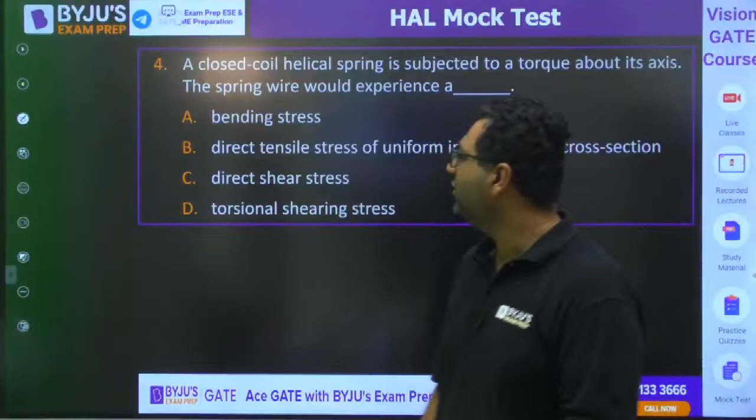Moving further, guys, this is the very first question. So why the number is 4? Because out of 100, my question numbers I am taking into consideration. So my first question is starting from question number 4. Yes, Ashish, good morning. This is the first question, guys. A closed coil helical spring is subjected to a torque about its axis. The spring wire would experience?

So I feel you are aware that whenever we are having this spring, and if you are going to apply a shear force like this, because of the shear force the wire is getting the twisting moment. So this is for the shear force. But whenever the closed coil helical spring is subjected to a torque about its axis, then my dear, you can see this is the axis of spring, and here if you are going to apply any torque, it will produce what? Vineet has given the answer as A. Yes, Sarath, welcome to the session.

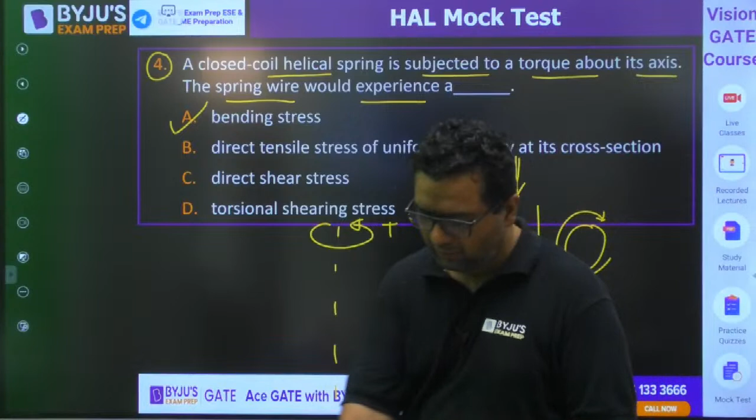So guys, the answer for this is bending stress, because when you are going to twist the spring about its axis, obviously it will be bending about the axis, and the answer is going to be A. It will be creating the bending stresses. Is it clear? Yes, bending would be the correct answer. Bhakti Marg, A is the answer. J, I feel you have given the wrong answer. Vineet's answer is correct. Moving to the next question, guys.

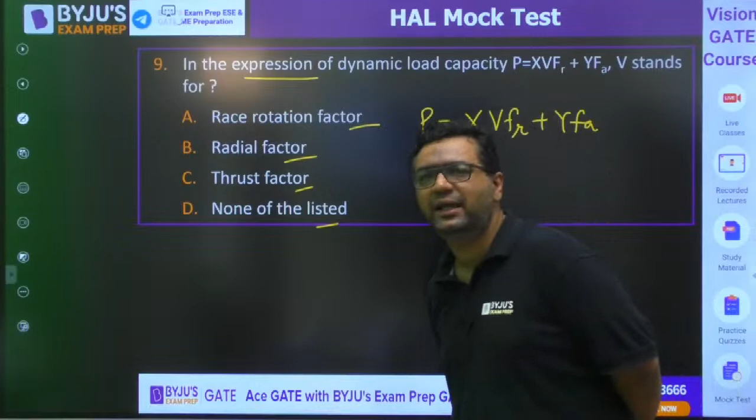Very good. Anish is saying race rotation, Malesh is saying A, Bhakti Marg A, Sarath A, Ashish A. The answer is A. Because you know here X is the radial load factor, Y is the thrust load factor, V is the race rotation factor.

Okay. Then we have next question, guys. This is from strength of material now. Very good, Vineet. A straight bimetallic strip made up of aluminium and steel. So we are having aluminium and steel. It is heated uniformly by passing the current through a coil wound over it. Means temperature will increase. What can be said about the nature of stress induced?

So my dear, you already know that this is steel, this is aluminium. Both are heated. So guys, what would be the answer for this? You know, alpha of aluminium is more than alpha of steel. This is the thing you must be knowing for this question. This is question number 11. What would be the answer for this? Okay, students are saying generally B.

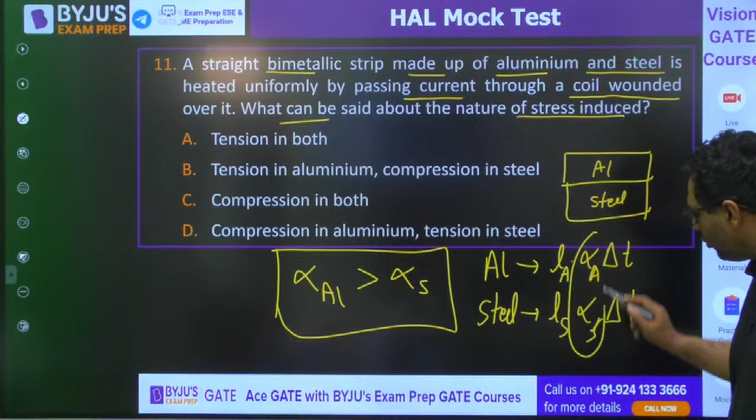So my dear, first of all, you need to understand that aluminium's alpha is more. So when you write L alpha delta T for steel and aluminium, this is L aluminium, L steel, alpha aluminium, alpha steel, delta T is same. When alpha of aluminium is more, obviously delta L for aluminium will be more. So tendency of aluminium to extend will be more than that of steel.

But as they are stuck to each other, they will be going with equal deformations. So steel will be applying compression in aluminium, aluminium will be applying tension in steel. So the answer is compression in aluminium, tension in steel. Parth, Papa Goda and Vineet have given the correct answer. Anish as well. So answer will be D for this, not B.

Arey bhai, when they ask tension compression, you need to see stresses, not strain. You can see now that aluminium is having more tendency to extend. This is having less tendency to extend. So that's why steel will be trying to compress it, aluminium will try to extend it. You need to think in this way. The answer is D for this.

Question number 13 now, once again from strength of material. If the principal stresses in a plane stress problem are sigma 1 is 200, sigma 2 is 50, they are asking maximum in-plane shear stress. Very easy question. Wonderful, guys. So Parth is saying the answer to be C. Papa Ghoda is saying C. Ashish is saying C. Bhakti Marg C.

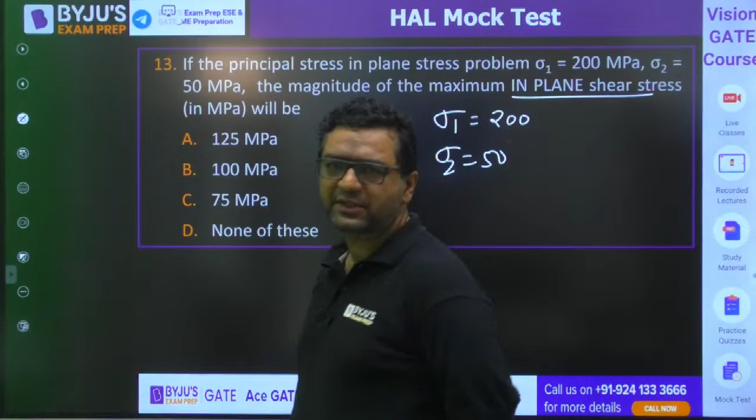Sarath C. And the answer is, you know that tau max in-plane is going to be sigma 1 minus sigma 2 by 2. It will be 200 minus 50 by 2. The answer will be 75. Very good, Malesh, Sarath. Wonderful, guys.

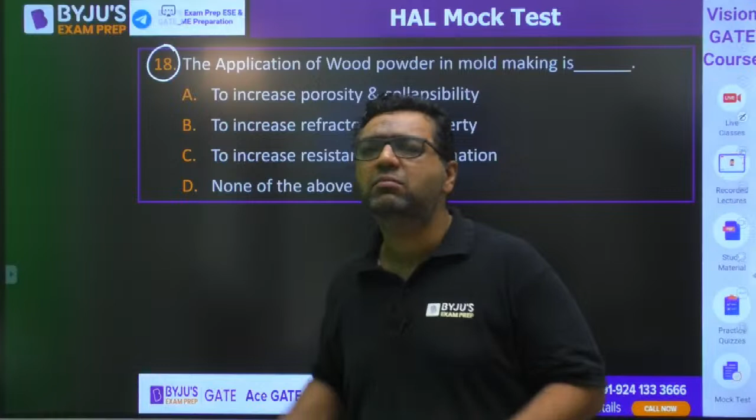And as you know, from 9th, paper is going to start, 9 to 12th. Ha, dear Parth, exam level is same, because I have talked to many of the students who appeared for HAL paper. They didn't find any problem in the technical part. They found some good questions in the non-technical part. For that, definitely the command should be there also.

So guys, next: the application of wood powder in mold making is to increase porosity, collapsibility, refractoriness. This is from metal casting. What would be the right answer for this question? Very good. Parth is saying A.

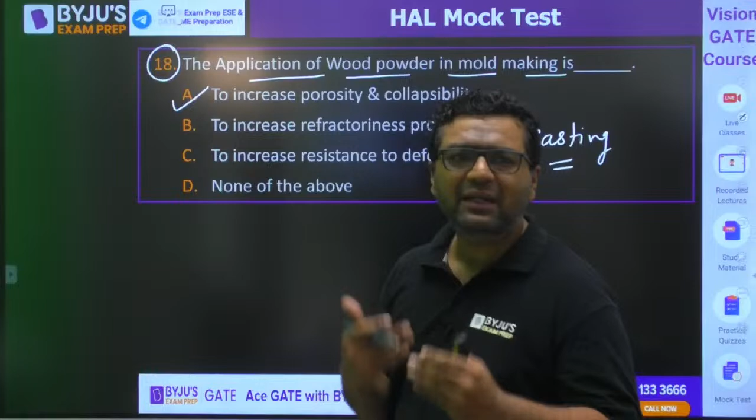Because they are not allowing calculator, the time is very limited, that's why. So they would not be asking very big numericals like that.

Parth, why are you thinking like this? I don't know. You are always asking such type of questions in very large number. If you concentrate that much in studies, you would definitely be selected. Because even if I say yes, it is fine, do you feel it is going to be? Every year the number of candidates is different, number of seats is different, level of paper is different. How can anyone say okay, that will be safe?

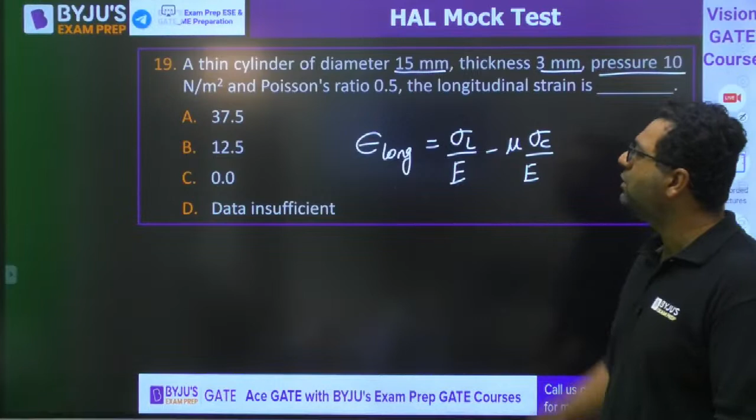19th question. They are asking a thin cylinder of diameter this, thickness 3 mm, pressure this, longitudinal strain is. Is it going to be 0? So, my dear, they are asking you the longitudinal strain. Longitudinal strain is sigma longitudinal by E minus mu times sigma circumferential upon E. I feel they have not given you the Young's modulus. So how can you get 0 or 12.5?

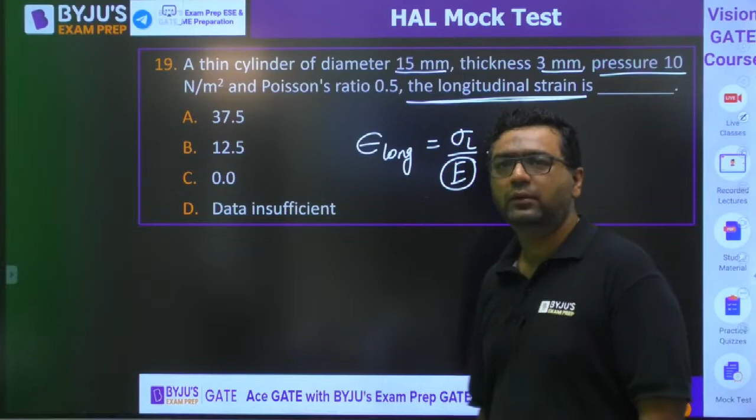Can you tell me how you have solved it without Young's modulus? Because it would require the Young's modulus anyhow if you are finding this. Okay, sigma longitudinal is PD by 4T, sigma circumferential is PD by 2T. Fine. But this is longitudinal stress, this is circumferential stress. He is asking longitudinal strain. So can you find it?

Dear, that is the formula for volumetric strain. Volumetric strain is going to be 1 minus 2 mu. Okay, mu is given as 0.5. Very good. So if mu is given as 0.5, then the volumetric strain expression is 1 minus 2 mu upon E, into sigma xx plus yy plus zz.

So my dear, whenever we are talking about this, volumetric strain is going to be this. This is defined for a cubical body, but yes, the answer will be 0 whenever mu is equal to 0.5. This is 0 for what? Volumetric strain, not for longitudinal strain. Is it clear?

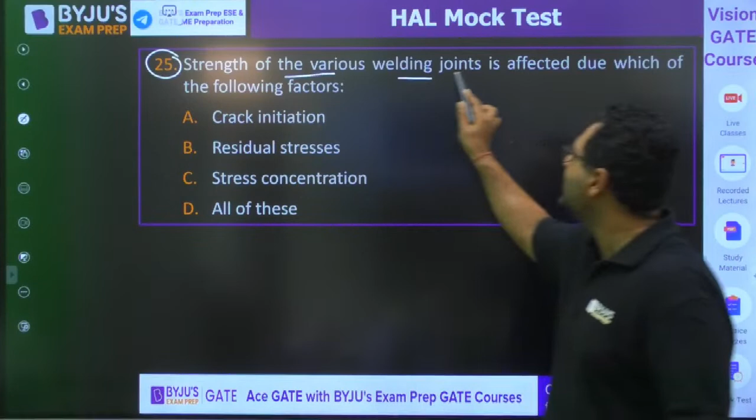Otherwise, if Young's modulus is not given, you cannot find the longitudinal strain. If the question were volumetric strain, then definitely the answer would be C. But if it is longitudinal, we require E, so data will not be sufficient. Okay. So moving to the next question, 25th, from machine design. Strength of the welded joint is affected due to which of the following factors? Crack initiation, residual stress, stress concentration, all of these.

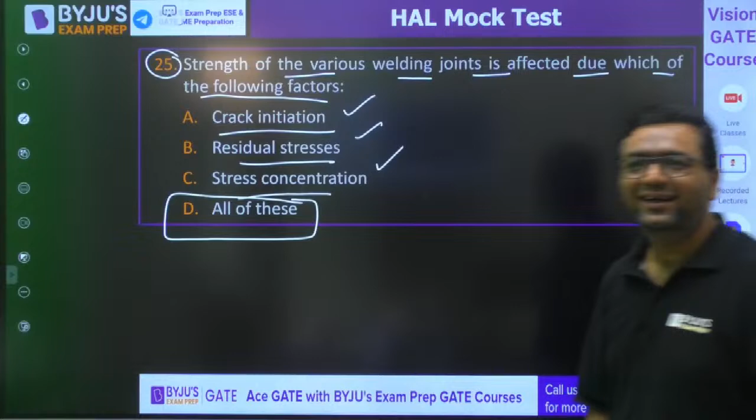Okay, yes, crack initiation, residual stress, stress concentration. All of the above is going to be the correct answer. Yes, Lakshman, Vinod, absolutely right. Rakshit, very good. So guys, answer is going to be D.

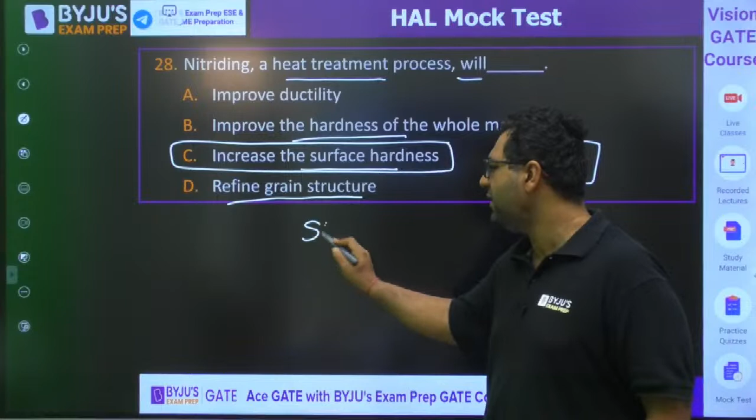Because there are some surface hardening techniques. What are their names? One is carburizing. Other is nitriding. Other is cyaniding. Other is flame hardening, induction hardening. These all are the answer.

Sir, somewhere it is mentioned that the mechanical discipline syllabus in HAL includes only 5 topics. Jay Singh, I have taken an FAQ of HAL. In the HAL FAQ, they have directly mentioned that you will consider the GATE 2023 syllabus as the standard. That FAQ is not from my mind. I have taken it based on the frequently asked questions mentioned on the HAL official site.

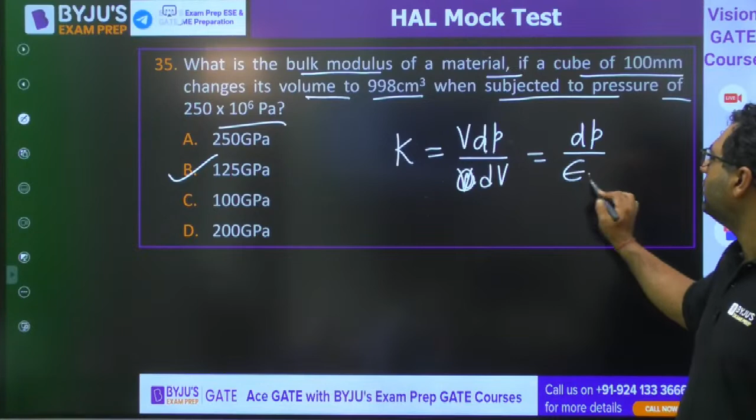You know what is the bulk modulus? K is given as V dP by dV, because it is nothing but dP by volumetric strain. They have given you dP and the change of volume. This is 100 mm, so you will have 100 cube mm cube, changing to this. Put the values, and bulk modulus will be 125 GPa. Moving to question number 37.

Moving to the next question, what does hydrostatic pressure in extrusion process improve? It is talking about hydrostatic extrusion, the process where we use fluid. This would be our billet, and this would be the ram. There is no direct contact of our workpiece with the dies. Here we have some lubricant or fluid, and that fluid applies the pressure.

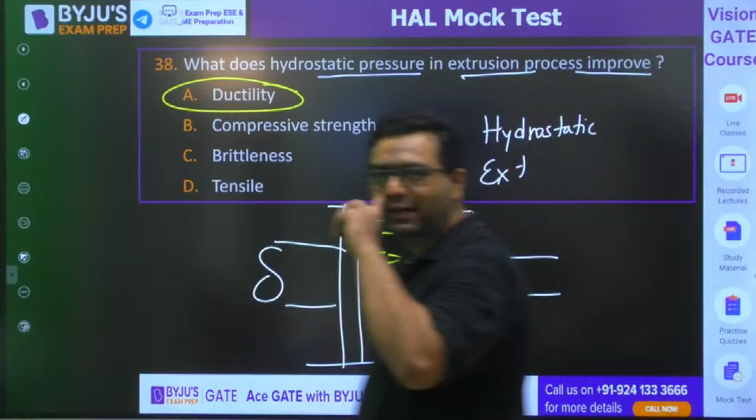So which property are we going to improve here? Is it ductility? Yes, Dukhyatma, you are correct. Uma Shankar, Sarath, Ashish, A is correct. God of Mechanical Engineering, very good. So the answer would be A. This is also said to be pressure induced ductility.

We also call it pressure induced ductility. So the answer is A.

This question I have taken from last year's paper only.

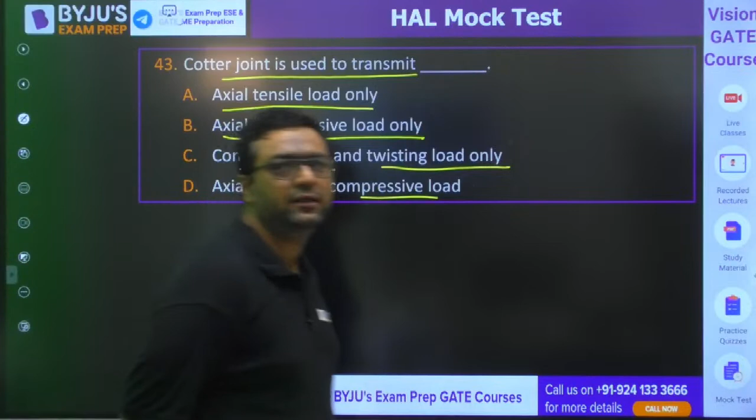Okay, when we are talking about the cotter joint, what would be the answer, guys? The answer, whenever we are talking about the cotter joint, is D.

Actually, cotter joint is not in the syllabus of GATE, but it is in the syllabus of engineering services. So I have taken it, although they have mentioned only GATE syllabus, it has been seen that previously they have asked about cotter joint. So I have taken axial tensile and compressive load will be borne by this cotter joint. This is from machine design.

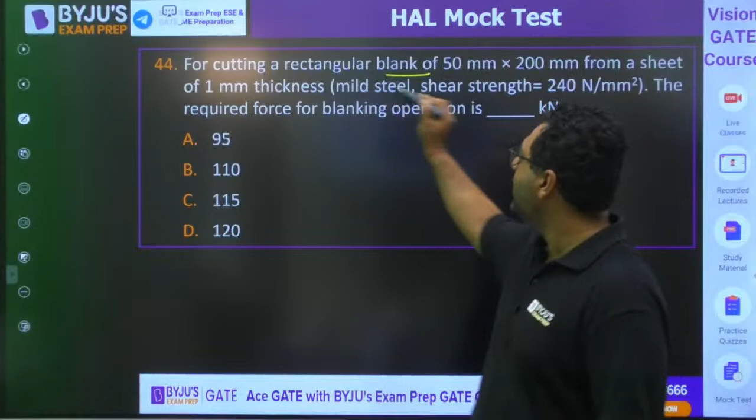Okay, for cutting a rectangular blank of this size - this is the width, this is the length - from a sheet of this thickness, and they are saying that this is the shear stress tau ultimate. What is the required force for the blanking operation?

So you know the formula for the shear force. It is going to be width into thickness into tau ultimate. So guys, what would be the answer for this? Question number 44 it is.

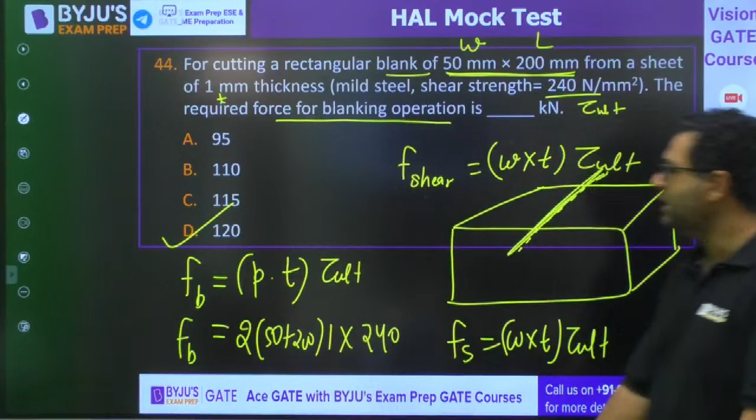For that, the blanking force formula will be perimeter into thickness into tau ultimate. Perimeter is 2 times of 50 plus 200, into thickness, into tau ultimate. Tau ultimate is 240. So what would be the final answer for this? Is it D? Yes, the answer is going to be D.

Moving further to the next question, question number 50. This turning operation is carried out on the lathe, from metal cutting. The thrust force in turning will increase with increase in side cutting edge angle, rake angle, nose radius, or end cutting edge angle.

Till now there is no data for that. If data would be coming, I will surely be telling you. We are always having an eye on such data, but that will be coming if any student applies for it, you can say RTI and all, but till now it didn't come in front of us. If it comes, I will come up with a session on that. Don't worry.

This is from metal cutting. He is asking the thrust force in turning will increase with. The answer will be side cutting edge angle. Thrust force is going to be affected by side cutting edge angle. The answer will be A for this. So guys, I feel you got this.

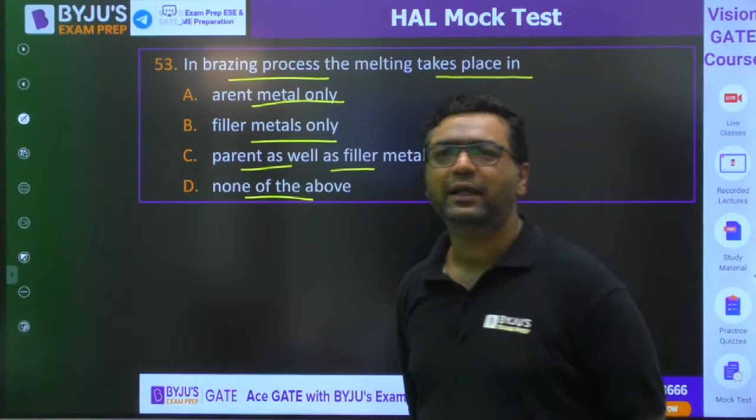Very good guys. Moving to 67, a machine design question. He is asking about Wahl factor. What is the answer? Is it 4C minus 1, 4C minus 4, plus 0.615 by C? What is the correct answer out of these four?

Papa Ghoda is saying A. Very good. What about others? Koshaki Kumari says A, Ankit says A, Jai Singh says A, Vinod says A, Arnab says A. Very good guys. The answer for this is A.

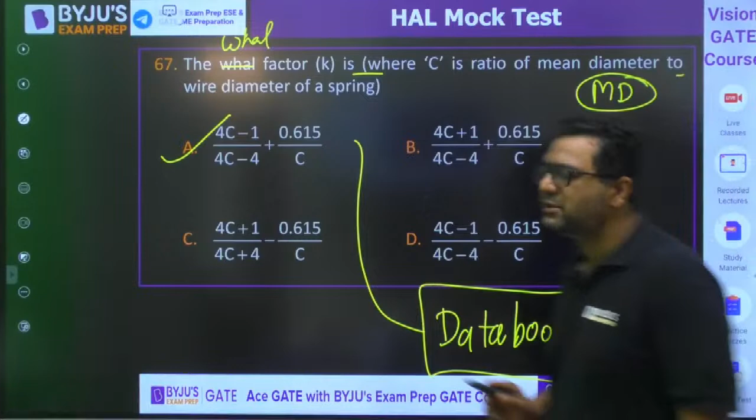So you know this is actually coming from the data book. But this type of question has been there in HPCL paper, HAL paper, and all PSU exams are asking this again and again, so it is going to be important. Wonderful Lakshman. A is correct. Moving to question number 70.

A steel rod of 200 mm length held between two rigid supports. We are having a steel rod held between two rigid supports, 200 mm is the length, and it is heated by 35 Kelvin. So delta T is 35 Kelvin. They are asking, if the coefficient of thermal expansion alpha is given, and Young's modulus is given, find the stress induced. You know the thermal stress formula is E alpha delta T for this.

E alpha delta T for this, independent of area. Sarath is saying D for this.

What about others? Anish is saying D. Very good. Ashish D, Arnab D. Very good guys. Ankit D, Movies D. The answer is D.

It is very simple. You can see in thermal stresses also they ask very easy cases. So in the technical section, you are not going to suffer in the questions.

What is the loading in the grinding operation? In the grinding operation, you are going to see a lot of terms like loading, glazing. You need to be clear about all these terms. Truing, dressing. So they are asking the first term, which is loading. Loading is: blunt wheel grinding, dressing of grinding wheel, chips clogged around the abrasive, or none of these. What is the answer?

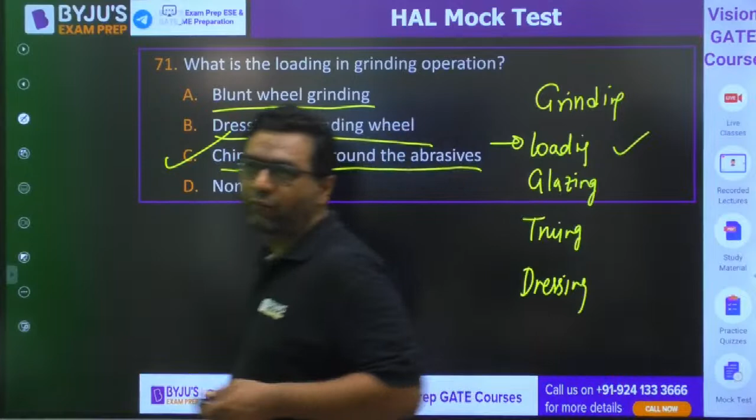Very good guys. So moving further, question 72, this is from casting. While cooling, a cubical casting of side 50 mm undergoes 1%, 2% and 3% volume shrinkage during the liquid state, phase transition, and solid state. And they are asking you the volume of metal compensated by the riser. This type of question has already been seen in the GATE exam twice. So this type of question is a GATE 1-marker. You can have it in HAL, HPCL, all types of exams.

So the answer will be what? You know that for the first two stages the riser is compensating. So 1% plus 2%, that is 3%, would be your answer. And for this 3% you need to give shrinkage allowance. Answer will be B for this.

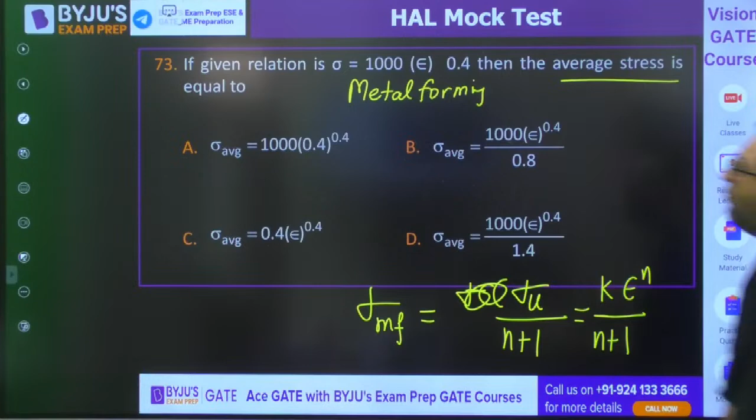Moving to question number 73, this is from metal forming, power law in strain hardening. This is from basics of metal forming. They are asking you the average stress. I feel everybody knows mean flow stress or average stress is given by sigma ultimate divided by n plus 1. What is sigma ultimate? It is K epsilon to the power n. So mean flow stress is K epsilon to the power n divided by n plus 1. Since they have already given you that K epsilon to the power n, can you give the answer? Already you guys have given the answer as D. Yes, D would be the right answer.

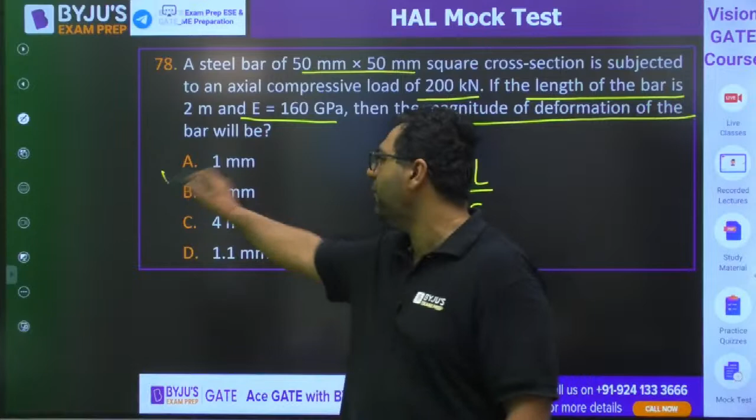I feel the answer will be 1 mm. Are you getting it as 1 mm? As it is compressive, but 1 mm would be the answer. Very good, guys. बहुत ही बढ़िया.

Moving to 79. Essential ingredient of any hardened steel is. So किसी भी hardened steel में क्या होगा इनमें से? Carbon, austenite, martensite and pearlite. Question number 79 it is. Essential component.

Anish, don't worry. After the exam, I will be able to tell you, after talking to the students. But I will try to tell you about last year. Srirag, Dekh Raha Hai Vinod. No, Lakshman, there is not.

The answer will be martensite for that. Because whenever we go for the process of hardening, hardening gives the martensite structure. That's why the answer will be martensite. Even if you are talking about mild steel, it has carbon, but that is not hardened steel. So when you go for hardening, you will have martensite structure.

Question number 81, guys, once again from strength of materials, Mohr circle this time. They are saying sigma xx 130, sigma yy 40, tau xy 40. What is the radius of the Mohr circle? I feel everybody is aware that you need to find out the radius. So first of all, you will say tau max. Tau max is the square root of sigma xx minus sigma yy by 2 का square plus tau xy का square. This will give you the value of tau max.

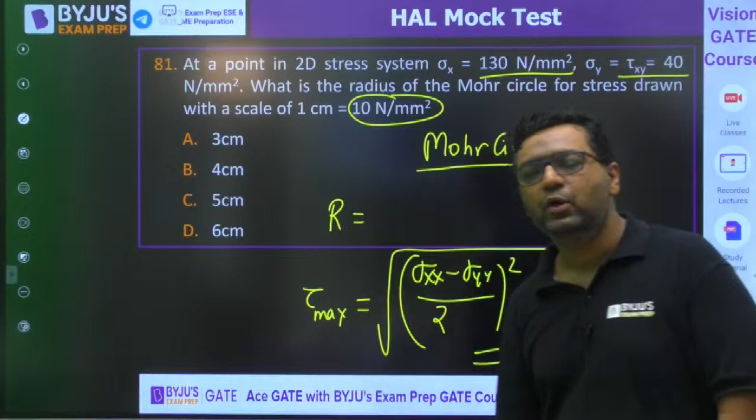Rakshit, martensite is the product we get after the hardening process, because the FCC structure is getting converted into BCT, body centered tetragonal. That is the point. So whenever we go for those processes, yes, martensite is the hardest of them.

Viral, D, Papa Kagoda D, Badul Pillai D, Sarath D. Everybody is saying D, the answer will be D. Question number 81 it was. I am left with 4 to 5 questions of mine. After that, Chandra sir would come.

A roller contact type bearing has a rated bearing capacity. They are saying the dynamic load carrying capacity is 20,000. Load is 4,000, and speed they have given as 600 RPM. They are asking you the life. You know P L to the power 1 upon 3 is equal to C. You need to find out the life in million revolutions. Solve it and get the answer, guys. Machine design question it is. 3 more questions after that.

Yes, Sarath, Badul, Papa Ghoda, Viral, Srirag, Lemon, Rakshit, Jay, Raghavendra.

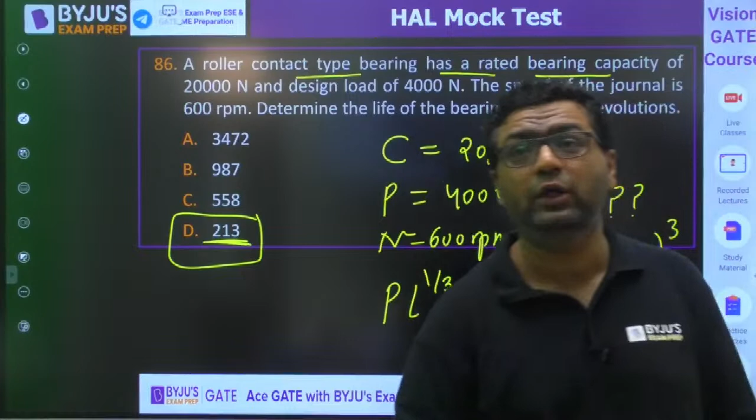Okay, Dekh Raha Hai Vinod has told you the cutoff. Yes, I have an idea that it was around 105. So the idea is there, but exactly category-wise I don't remember.

Yes, it was near to 105 or 108, whatever you are saying. Don't worry, I will share it. Okay, it is 125. 125. So in that case, I feel there should be some misprint, but as per my calculation, I have written D. It means here it would be the correct answer, which is not typed correctly here. Okay, no issues, but you know how to do it. Then we are talking about the next question.

Find the modulus of elasticity of a rod which tapers uniformly. So you have diameter D1 as 30 mm, D2 as 15 mm, and the length is 300 mm. In 1 to 2 questions typing may go wrong, dear, because just yesterday we made the paper and today you are having that paper in front of you. So sometimes 1 to 2 typing errors are allowed.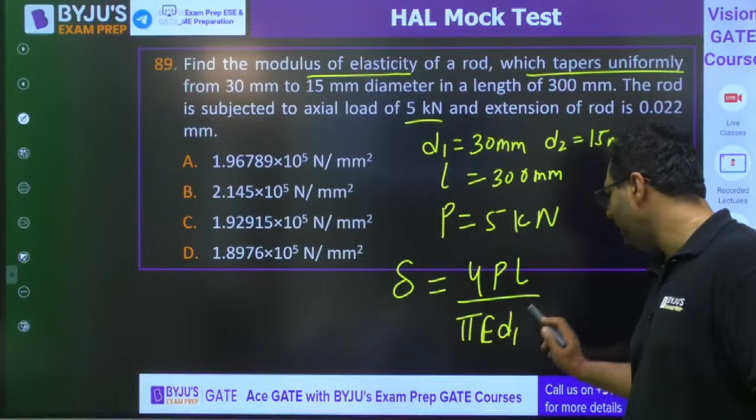So this is length. Then the rod is subjected to a load of 5 kilonewton. And delta is also given. You know delta is 4PL upon pi E D1 D2. You need to find out E, all other things are given to us. This is question number 89. After that, we have 2 more questions from my side. Solve it and get the answer.

Yes, the answer in the previous case will be 125 million revolutions. Tell me the answer for this. Young's modulus you need to calculate. Question number 89 it is. What would be the answer?

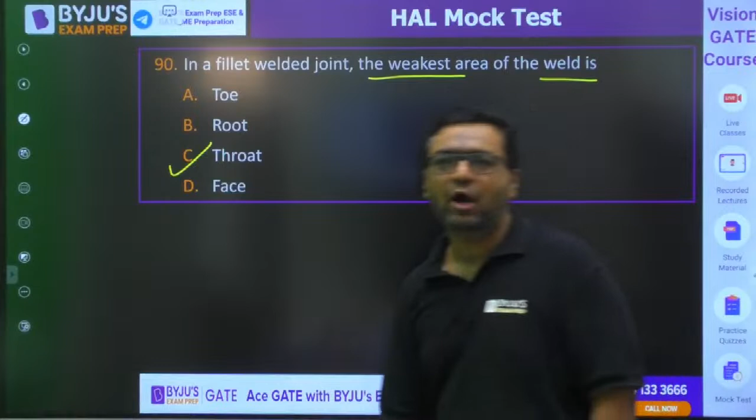In a fillet welded joint, the weakest area of the weld is? The weakest area is the one having the smallest cross section. Easy question. Toe, root, throat or face? Ashish, Papa Kagoda, everyone is saying C. Throat is correct. Now, my dear, I am coming up with the last question from my side.

After that, Chandrasekhar sir will come for fluid mechanics and heat transfer questions. Then Suraj sir will come for TOM, engineering mechanics and industrial engineering. Then Vipin sir will come for thermal and application. So the journey is bigger. Be there for all 100 questions.

The answer is D for this.

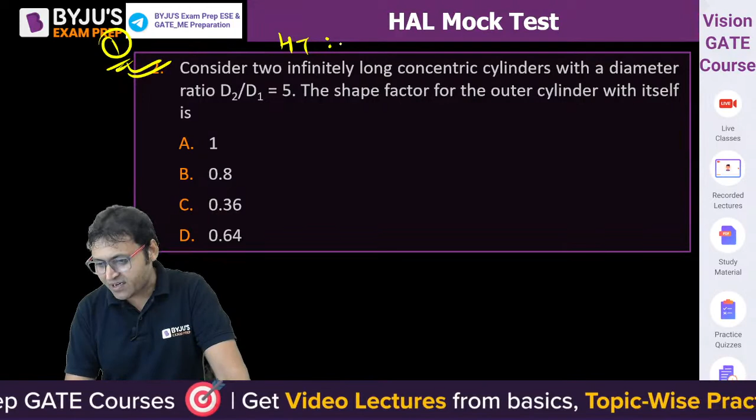So let us start with this question. The first question, the numbering will be quite different. I have not changed the numbering as such, but whatever the questions among the 100 questions were there from the heat transfer and fluid mechanics, I have kept that numbering as it is. So this is our question number 1. The question is from the heat transfer, most specifically it is from the radiation shape factor. Everybody, please do let me know the answer.

Lakshman, only admit card will be required, and you can carry your identity card as well. Nothing else will be required.

Consider two infinitely long concentric cylinders. Please do not commit the mistake in understanding it as a sphere, because the diagram or the analysis of spherical systems and cylindrical systems are quite similar. So there is one surface and another is 2, with the diameter ratio D2 by D1 is 5. Outer cylinder is 2 and inner cylinder is 1. The ratio of diameter is 5.

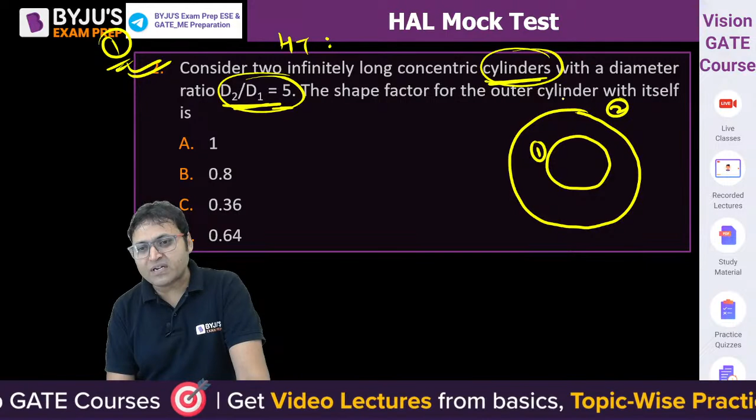The shape factor for the outer cylinder with itself is, we need to find out F22. What is F22? Everybody, please give it a try. So inner cylinder is insulated from inside and outer cylinder is insulated from outside, right? Then only they can have the radiation heat exchange. So because the inner cylinder is insulated from inside, it is becoming a convex surface, and for the convex surface the self shape factor will be 0. If the question would have been for the inner cylinder, the answer would have been 0.

So this is an enclosure. Apply the enclosure theorem. We can say F11 plus F12 is equal to 1. So if F11 is 0, F12 is equal to 1. Again, we can write F21 plus F22 is also equal to 1, enclosure theorem. So F22 is equal to 1 minus F21, and we know A1 F12 is equal to A2 F21. So F21 is A1 F12 upon A2. So the final expression for F22 is 1 minus A1 F12 upon A2, and F12 is 1.

So it is 1 minus pi D1 L upon pi D2 L. So 1 minus D1 by D2 will give you the correct answer. F22 is 1 minus D1 by D2, right? And what is D1 by D2? D2 by D1 is 5, so it will be 1 minus 1 by 5. 4 by 5 or 0.8 will be the right answer for this one. Isn't it? Is this clear? 0.8 will be the correct answer for question number 1.

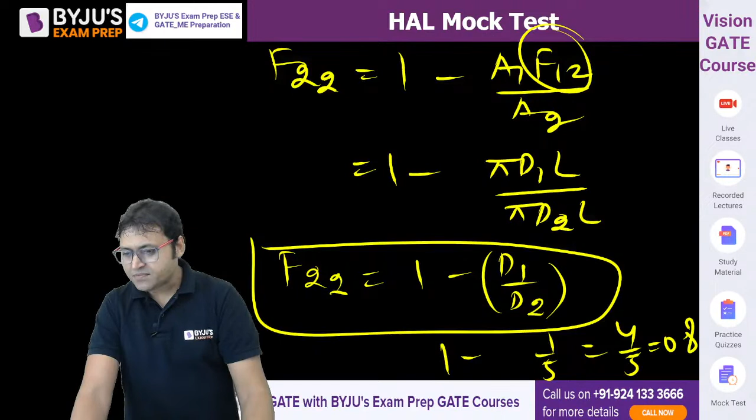Read the question carefully and try to get me the answer. Yes, Sarath, Lemon, Vinod, Pillai, good, good.

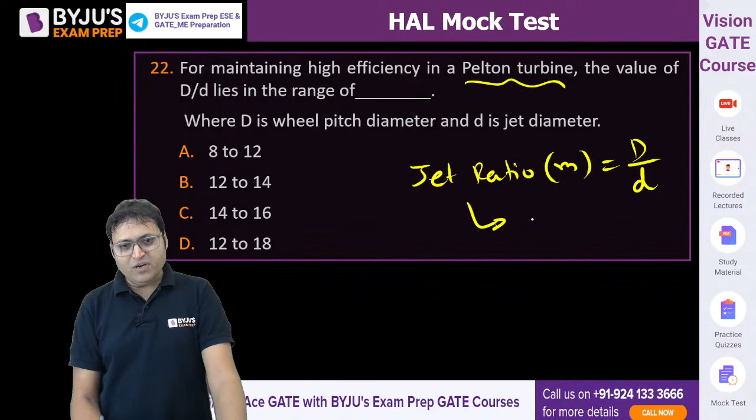In a Pelton wheel turbine, the jet ratio m is the ratio of capital D by small d. It is around 14 to 16. The ratio of capital D by small d should be around 14 to 16 for the maximum efficiency. For maintaining the higher efficiency, it is option C. The value of capital D by small d is 14 to 16. Isn't it?

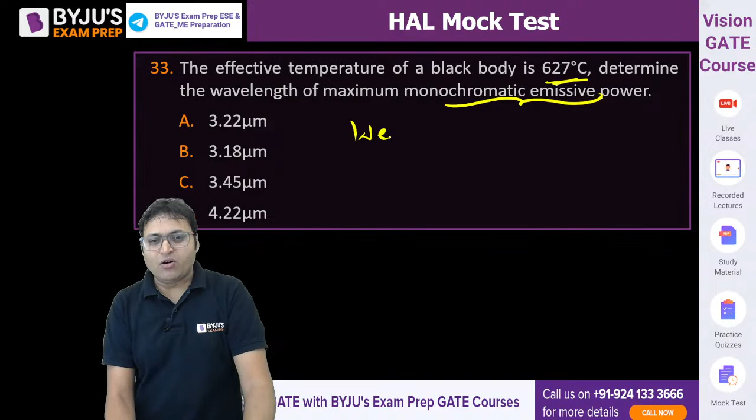The effective temperature of a black body is 627 degrees Celsius. Determine the wavelength of the maximum monochromatic emissive power. This is from Wien's displacement law. The effective temperature of the black body is given in degrees Celsius. According to Wien's displacement law, lambda max into temperature is 2898 micrometer Kelvin.

So we need to find out lambda max. Lambda max is equal to 2898 divided by absolute temperature. T must be absolute temperature, 627 plus 273. So it should be less than 3000 upon 900, so less than 3.33. It should be slightly less than 3.33. So 3.22 will be the answer. Yes, Sarath. Well done. Ashish, Papa Kagoda, Lemon, Chandrasekhar. Great. Option A will be the right answer.

So this is the difficulty level in the HAL exam. So you can easily score, and because of the difficulty level, the cutoff will also be higher. So you should be ready with that.

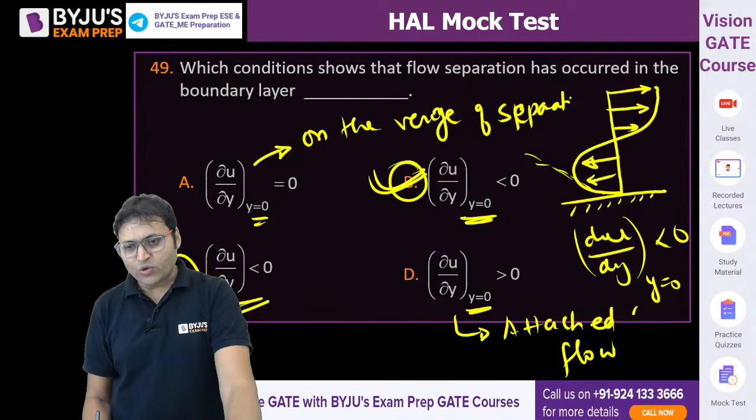When du by dy at y is equal to 0, in B and C, B will be the right answer. It should be y is equal to 0. Are you getting it? B is the correct answer, not C. Sarath, Lakshman, it is option B. Negative velocity gradient at the surface will give rise to flow separation, and positive gradient will give rise to attached flow. No separation of the flow.

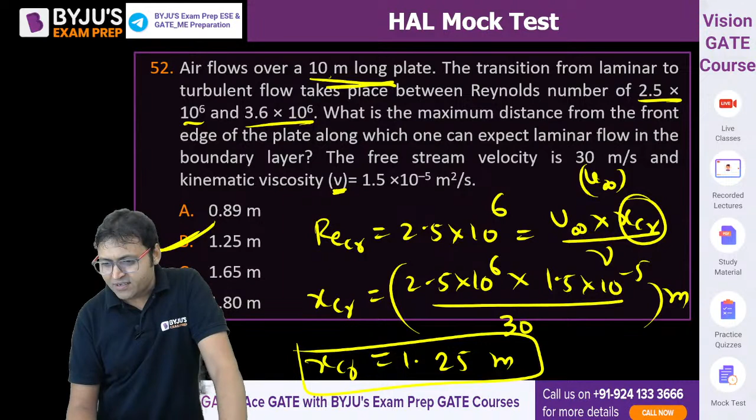Right? Can you solve it without using the calculator? What will be the answer? Isn't it 1.25 meter? The value will be 1.25 meter. B is the answer. Yes. Well done, Anish, Sharat, Pillai, Vinod, Papa ka ghoda. Great. The next one.

From heat transfer, and it is from radiation heat transfer. Three very large plates of same area are kept parallel and close to each other. They are considered as ideal black surfaces and have very high thermal conductivity. The first and the third plates are maintained at temperature 2T and 3T respectively. We need to find out the temperature of the middle plate under steady state. So T1 is equal to 2T, T3 is equal to 3T, and we need to find out T2.

Because it is in steady state, Q can be written sigma into T1 to the power 4 minus T2 to the power 4. Q will remain constant for steady state, so that is equal to sigma into T2 to the power 4 minus T3 to the power 4. Sigma will get cancelled out. 2T to the power 4 minus T2 to the power 4 is equal to T2 to the power 4 minus 3T to the power 4. So 2 T2 to the power 4 is equal to 2 to the power 4, that is 16, plus 3 to the power 4, 81, into T to the power 4, isn't it? So T2 to the power 4 is equal to, what is 16 plus 81?

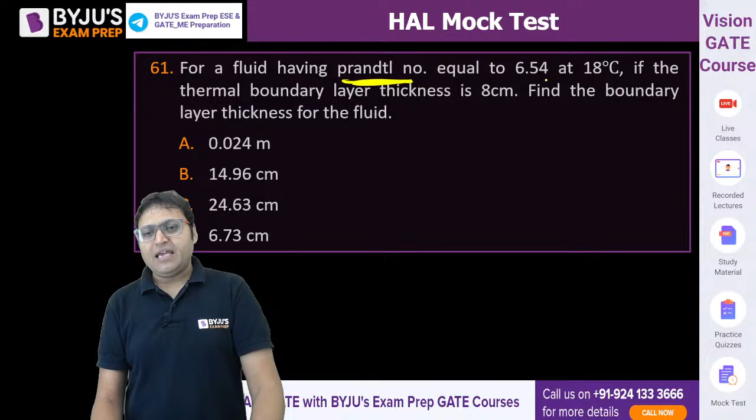The next one: for a fluid having a Prandtl number equal to 6.54 at 18 degrees Celsius, if the thermal boundary layer thickness delta T is 8 centimeters, find the velocity boundary layer thickness for the fluid. It means we need to find out the velocity boundary layer. So velocity boundary layer divided by thermal boundary layer is equal to Prandtl number to the power 1 by 3, for laminar boundary layer. If it is laminar boundary layer, then only the relation between thermal and velocity boundary layer can be written.

So delta V is equal to delta T, 8 centimeter into 6.54 to the power 1 by 3. If you take it as 8, it should be less than 8 into 8 to the power 1 by 3, and 8 to the power 1 by 3 is 2. So it should be less than 16 centimeter - it should be less than 16 centimeter. What will be the answer? It is close to 16, but it will be less than 16 centimeter, so C and D cannot be true. That is how you can make your calculation simple. 14.96 will be the right answer.

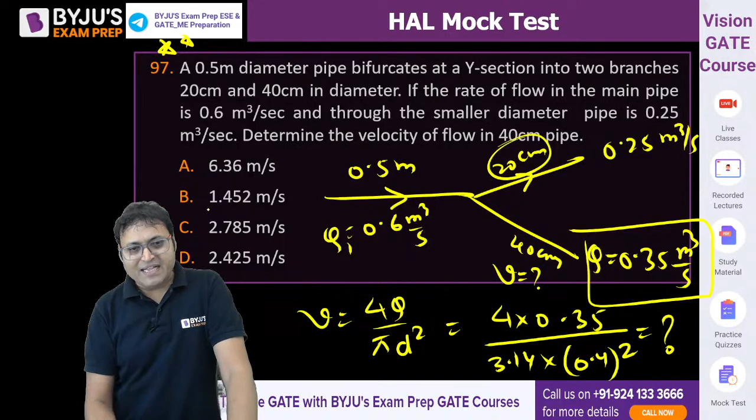Are you getting 2.785? 2.785 meter per second will be the answer for this one. And the last question from my side.

What is the shape factor of a hemispherical body placed on a flat surface with respect to itself? If there is a flat surface and a hemispherical body kept on it, let this be surface 1 and this be surface 2. This makes an enclosure, so we need to find out F11. So F11 plus F12 is equal to 1.

So F11 is equal to 1 minus F12, or we can say F11 is equal to 1 minus A2 F21 upon A1. And what is F21? Since F22 is equal to 0 for the flat surface, F21 will be equal to 1 from the enclosure theorem. So F11 is 1 minus A2 by A1.

What is A2? A2 is pi r square and A1 will become 2 pi r square. So it is 1 minus 1 upon 2, that is 0.5. It is independent of radius, it will be 0.5, independent of radius. C will be the right answer.

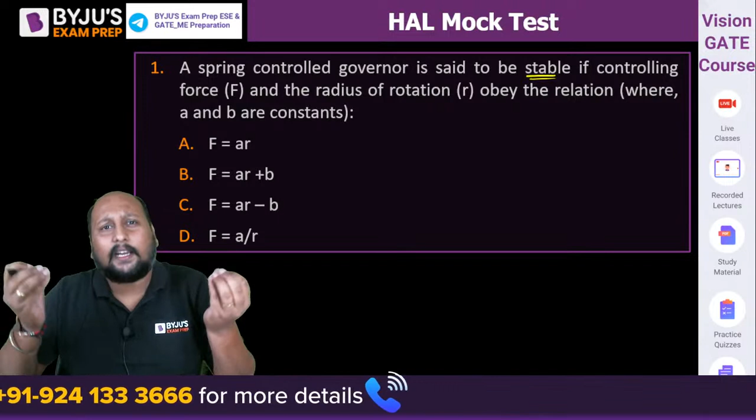Ashish, Raghavendra, Sharat, Gajanan - everyone please let me know quickly, A, B, C or D. For a stable governor there are three conditions in the governor: stable, unstable, and isochronous.

Very good, Mani, very good. Option C is correct. For a stable governor, the controlling force FC is equal to AR minus B. For an unstable governor, FC is equal to AR plus B, and for an isochronous governor, FC is equal to AR. So option C is the correct answer - a very easy question, straight from the concept of governors in theory of machines.

Hello, good afternoon, hello Sumit, hello Ashish - option C, everyone is getting the answer correct. You won't believe the same question was repeated in ESE also. So some ESE questions do repeat elsewhere. So if you are practicing for HAL or ISRO or HPCL, practicing previous year ESE questions will also help you out.

Okay, next question, question number two. Multi-cylinder engines give uniform torque, more unbalanced force, need larger flywheel, or all of the mentioned above. Which of the following is correct or appropriate regarding multi-cylinder engines?

If you try to remember, if you're having a multi-cylinder engine, do we require a larger flywheel or a smaller flywheel? A simple question - if instead of a single cylinder you're using a 6-cylinder engine, do you require a larger flywheel or a smaller flywheel? It requires a smaller flywheel.

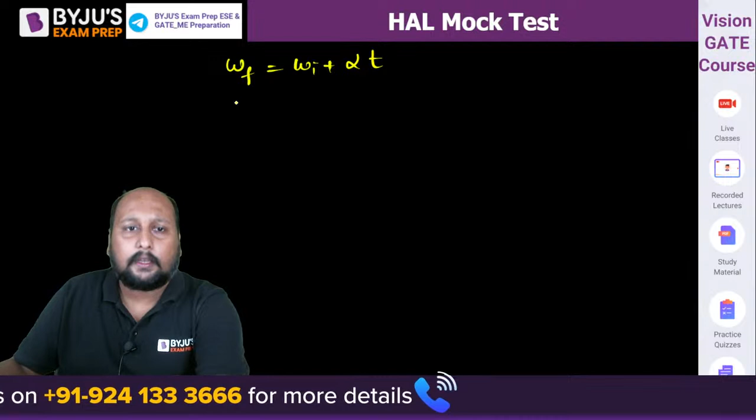Bhai, we can use the equations of motion. Omega final is equal to omega initial plus alpha into t. So this is 0. Omega initial is your 10, plus alpha into 10. So alpha is equal to minus 1 radian per second square. What's the significance of this minus? That is a retardation. So I can simply say the magnitude is equal to 1 radian per second square.

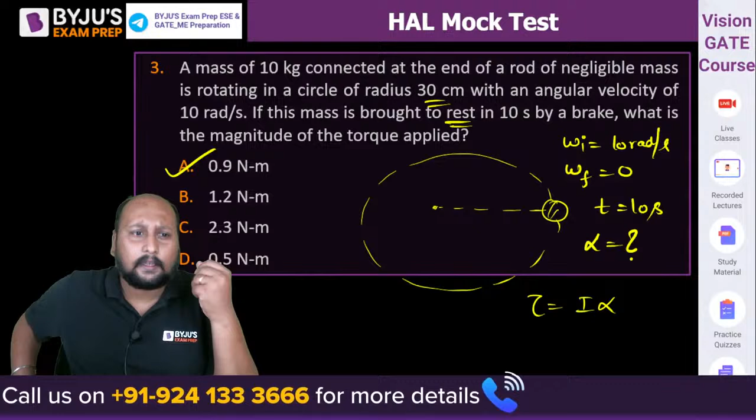So what is torque? Torque is equal to I into alpha. I is mr square, mass is 10. What's the radius? Radius is 30 centimeter. So 10 into 0.3 square into 1, that is coming out to be 0.9 Newton meter. Option A is the correct answer. Very easy question. Dekho yaar, question level is very basic. If you only have the basic concept of the subject, you will be able to solve majority of the questions. Yes, option A is the correct answer.

Let us go for the next problem on the screen. Chalo, next question, question number 4. This question is from industrial engineering. Normally in ISRO, industrial questions are very, very less. But in HAL, a good number of questions is being asked from this particular subject in this particular exam. So make sure you are having a good practice of this.

In a single server infinite population queuing model, arrival follows a Poisson distribution with a mean value of 4 per hour. So lambda is equal to 4 per hour. If the service time is equal to 12 minutes, what is the service rate? If 12 minutes is taken to serve one customer, in 1 hour, 60 by 12 customers will be served. That is 5 customers per hour. So they are asking you what is the expected length of the queue, LQ value, quickly. 4, 3.2, 1.25 or 5.

Simple question. We calculate the value of utilization factor, that is rho. Rho is equal to lambda by mu, that is 4 by 5, that is 0.8. So what's the value of length of the queue? Length of the queue is equal to rho square upon 1 minus rho. So this is 0.8 square divided by 1 minus 0.8, that is 0.64 divided by 0.2, that is equal to 3.2. Option B is the correct answer. Very good. A simple question from the queuing model from industrial engineering.

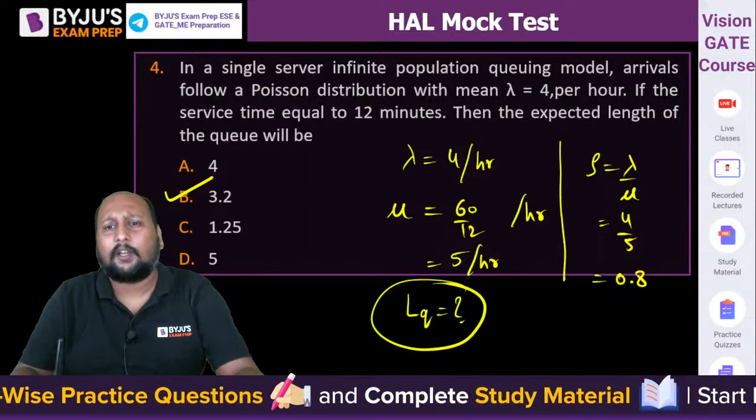Very good. बहुत बढ़िया. Very good. Yes, yes. Okay. Can we go to the next one?

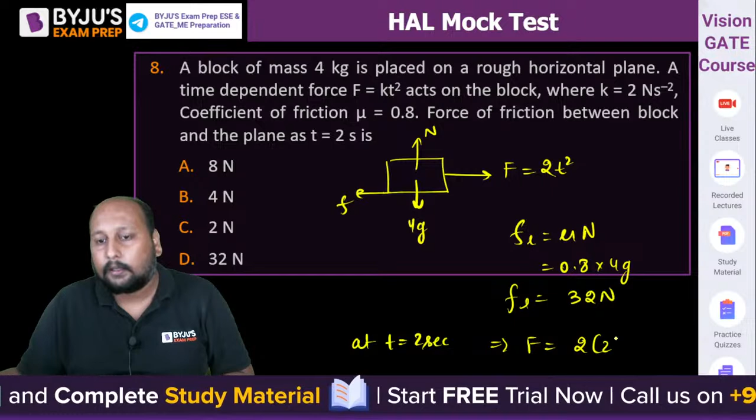They're asking what will be the friction force at t equal to 2 seconds. So at t equal to 2 seconds, what is the force being applied? That is 2 into 2 square, that is equal to 8 Newton. You are only applying 8 Newton, limiting friction is 32, you will be only getting 8 Newton, because it's a static condition.

Option A. Option A, is this clear? Because see, in order to move this block, you have to apply a force of minimum 32 Newton. And you are applying a force of only 8 Newton after 2 seconds, which is much less than the limiting friction. So the body is in static condition. The body is in static condition, so whatever force is being applied, the same will be the friction force. Option A is the correct answer.

Very good all of you. Srirag, very good. Yes, Utkarsh, Mani. Next question, question one, Vinay, clear?

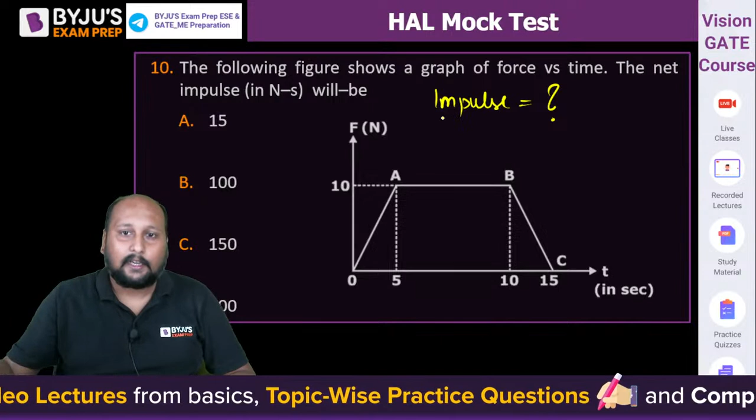Chalo, next question. A simple question. The following figure shows a graph between force and time. What is the net impulse? They're asking impulse. Easy question. What is impulse? It is the area under force versus time. Impulse is nothing but the area under force versus time. Chalo, quickly tell me what is the answer.

Find its area. There are 2 triangles and one rectangle. So the area will be equal to 2 times half into base 5, height 10, plus 5 into 10. So this is 50 plus 50, that is 100 Newton second. Option B is the correct answer. I hope you are able to see the options. Did the option hide behind me? Clear? Impulse is nothing but the area under the force versus time curve. So we are getting exactly 100 as the correct answer.

Achha, you're not able to see this. I'll be writing a bit above. Clear? This is 25. This is 50. This is 25. Add these, we will have 100 Newton second as the impulse. All clear?

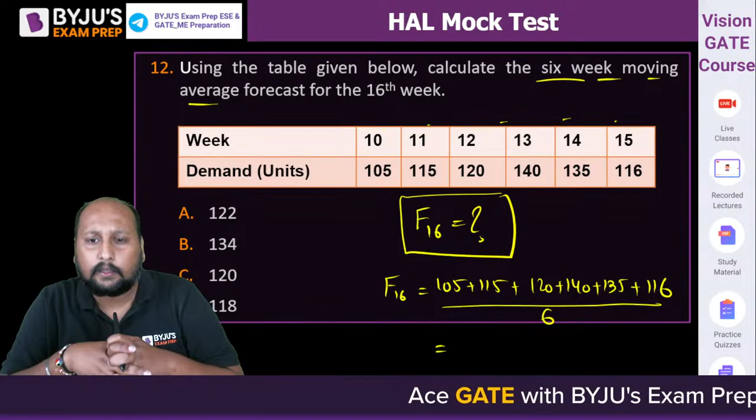Yes. What's the value? A? 121 something. 121.8 something like this. So near about we can say 122. Option A is the correct answer. 122, near about option A. Are we getting option A? Yes. Okay, can we proceed now? Next question. That is simple. We have to take the average of the 6-week moving average method.

Okay. Now, the previous question was, they were asking you what is the expected output. Whenever we need to calculate the expected output, we try to go for the ideal condition. That is the worst possible scenario. So in this case, if we're having 4 different machines, we always try to take the worst scenario, means the least capacity is 90. So that will be the expected, this much we will be getting from the system. Expected output means how much you can get from the system, that is 72. Clear, right? Whenever you are getting a question like this, we have to take the worst scenario. Ideal means that is always possible. So 72 will always be possible. 72 units we will always be getting from every shift. Okay, that is the expected output.

Okay, chalo, next question on the screen. Clear hai this one? Option A. Sumit, Ashish, Mani, very good. Let's go with the next question. Question number 13 on the screen. A very easy question from the theory of machines. Velocity of sliding at the beginning of engagement of the 2 gears is equal to omega P plus omega G into what? Fill in the blanks. Is it path of recess, arc of contact, arc of approach, or path of approach? A, B, C, or D. Very easy question from the gears terminology. What is velocity of sliding? Bhai, simple sa question hai. Very good, Ashish.

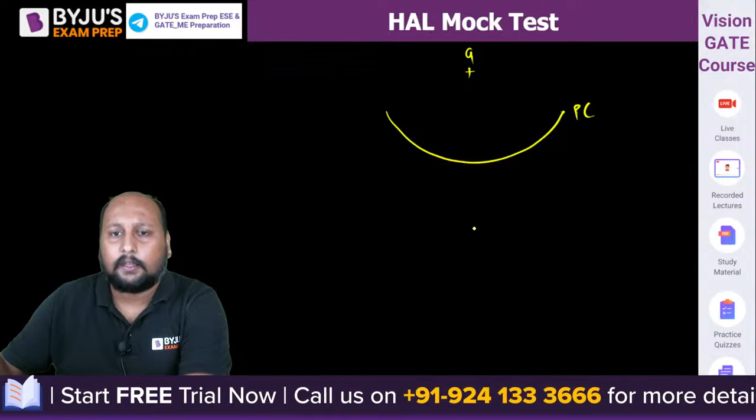If you remember, this is the pitch circle for, let us suppose, the gear. This is the pitch circle for the pinion. This is the base circle. You draw the common tangent to the base circles. This is your line of action. This is your pressure angle. This is point P. Now we are having one point Q, which is the moving point, that is the point of contact. So what is velocity of sliding? Velocity of sliding is equal to omega G plus omega P into PQ, right?

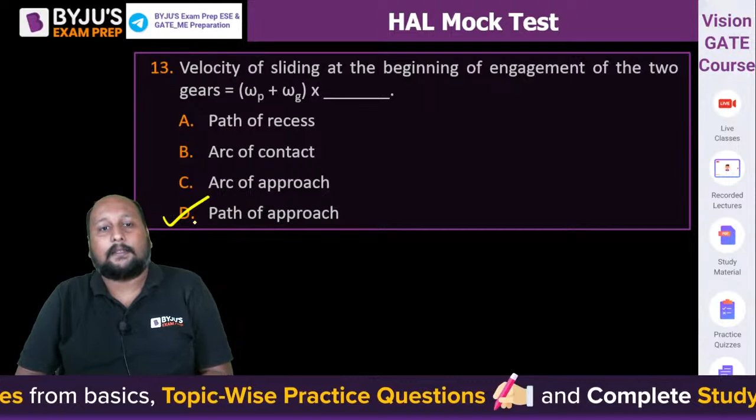And at the starting of contact, this Q is exactly over here. What is this PQ distance? PQ is nothing but the path of approach, not contact. Let's say this is K, and this is L. So PL is the path of recess, if I'm taking the ideal conditions. When the point of contact is exactly at the pitch point, we are having zero velocity of sliding. That is the reason we are having pure rolling condition. Pure rolling we only get at the pitch point; baki sab mein we are having a sliding condition. So option D is the correct answer, because this is the path of approach we are talking about.

Even if I explain it more elaborately, this is the addendum circle, right? So these are the two extreme points between which you will be having contact: this is K and this is L.

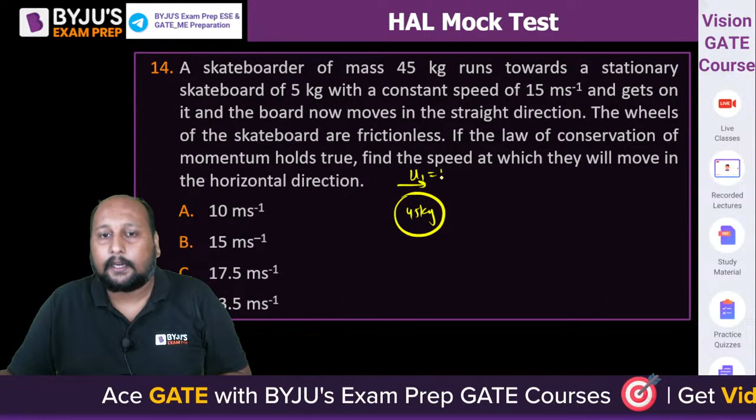Apply the conservation of momentum and tell me the answer. We are having a skateboarder having a mass of 45 kg moving with a velocity of 15 meter per second. There is another skateboard having a mass of 5 kg which is initially at rest. After that, 45 plus 5 are combinedly moving with some velocity v. So we have to calculate that velocity v. 10, 15, 17.5 or 13.5.

I'll put this on the next slide because I think you won't be able to see. So v is equal to 45 into 15 by 50. So from here this becomes 3, this becomes 10. So this is 135 by 10 or 13.5 meter per second. Option D is the correct answer. Very good Badul, very good Sarath. Option D is the final correct answer.

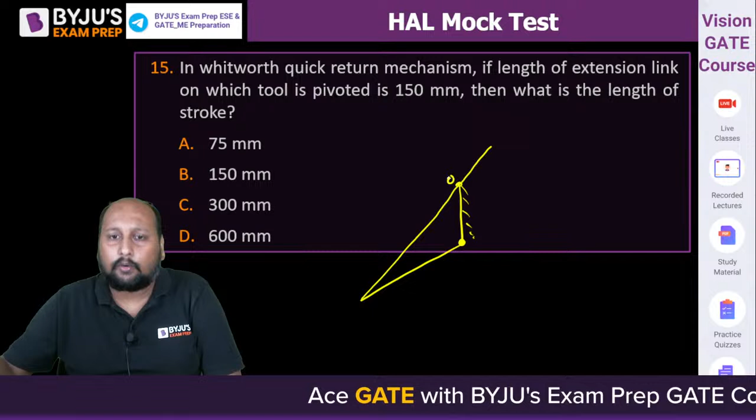These are the two centers. Let's say this is O1. This is having a motion like this, this is also having a motion like this, and this is connected with the link. So what will be the stroke length? Can we say this is nothing but twice the radius of this? Let's say this is point P. So OP distance is given as 150 mm. Then what will be the value of stroke length?

What will the stroke length be? The stroke length will be equal to twice of OP, that is 300 mm. Option C is the correct answer. Because this will be reciprocating, moving right and left. So due to these extreme conditions, we'll be having the stroke length. Simple, right? Option C.

Very good, Mani. Very good, Sarath. Very good, everyone. Gajanan, Utkarsh, Mani, Badul. Abhimanyu, Vinay, all clear? Can we go to the next one? Question number 16 on the screen.

A question from the vibration system. A vibrating system consists of a mass of 50 kg, a spring with a stiffness of X and a damper. The damping provided is 20% of the critical value. The damped frequency is 24 radian per second. What is the value of X? That means they're asking the value of the stiffness of the spring.

Mass is given as 50 kg. Damping is provided at 20% of the critical value, so zeta is equal to 0.2. Damped frequency omega d is equal to 24 radian per second. They are asking the value of K in kilonewton per meter. Quickly tell me the answer. Can we use the simple formulation that omega d is equal to under root of 1 minus zeta square into omega n?

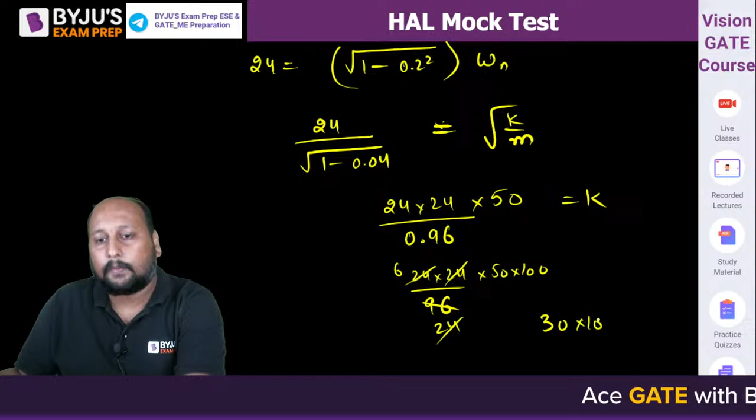Quickly tell me what's the nearest value we are getting: 15, 30, 45 or 60? We can round off this value as 24 into 24 into 50 into 100 divided by 96. So we can say this is 6, this is 2, 4, 24. So this is 30 into 10 to the power 3.

So K is equal to 30 kilonewton per meter. Option B, 30 kilonewton per meter is correct. Without calculator we need to solve it, and this is a very easy question.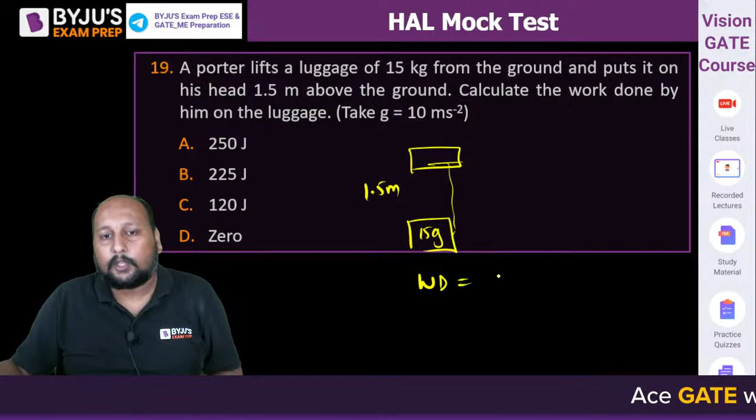Can we say this 15G block is moving from this point to a height of 1.5 meters? So definitely we are doing some work. Work done will be equal to force into displacement. So 15G into 1.5, that will be the answer. So 150 into 1.5, that is 225 joules. Option B is the correct answer.

Clear? Option B. Next question, question 20.

For a constrained kinematic chain having number of links n equal to 6, no higher pair, and relative motion among the links assumed to have single degree of freedom, how many binary joints do we have? Very easy question, use the Kutzbach equation. F is equal to 3n minus 1 minus 2j minus h.

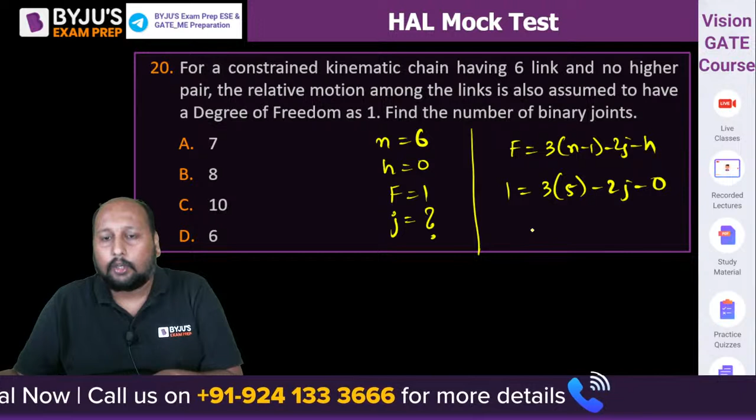They are asking for j. Very good. So F is equal to 1. 3 into (n minus 1), which is 5, minus 2j minus 0. So this is 15 minus 1, so 2j is equal to 14, j is equal to 7. Number of binary joints is option A: 15 minus 1 is 14, divided by 2, that is 7. Option A is the correct answer. Very good, Ashish, Reenag, Mani.

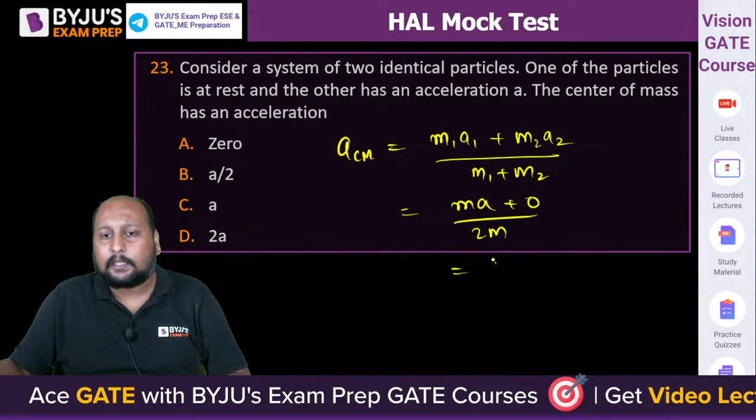What is the center of mass of the acceleration? Two identical particles. We can say the acceleration of the center of mass is equal to m1a1 plus m2a2 divided by m1 plus m2. This becomes ma plus 0 divided by 2m, that is equal to a by 2. Option B is the correct answer.

Because one of the masses is at rest. I'm assuming m2 is at rest and m1 has an acceleration of a, so we can apply this and get option B. Is this clear? Very good, very good.

Okay, next question 24, the second last question. Then I'll be calling Vipin sir to take charge, and from there thermal and application will be the topic he'll be discussing. The spring mass damper system has a mass of 5 kg, and the undamped natural frequency, frequency is equal to 40 hertz.

What is the value of critical damping coefficient, CC value? What's the value of CC? A simple formula: CC is equal to 2m omega n. That's it, 2m omega n.

Quickly, what's the answer? So 2 into m, that is 5. Omega n will be written as 2 pi into fn. So 2 into 5 into 2 pi into 40. What is the nearest value we are getting? This is 800 into pi, so 3 into 8 is 24, near about 2400. Option A, can we go with option A? Taking pi as approximately 3.14, 3 into 8 is 24, so near about 2400 should be the answer. So option A is the correct answer.

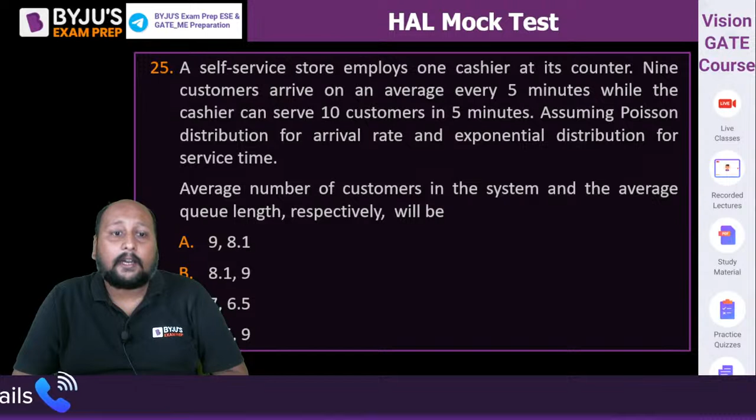A self-service store employs one cashier at its counter. 9 customers arrive on an average of 5 minutes. So can we say what's the arrival rate? If 9 customers arrive in 5 minutes, can we say 9 by 5 customers arrive every minute? That is equal to 1.8 customers arrive every minute.

Now, what is the service rate? They say 10 customers can be served in 5 minutes, so can we say 10 by 5 customers can be served in a minute? So we can say 2 customers can be served in a minute. Once lambda and mu values are calculated, what is the number of customers in the system and the number of customers in the queue? It's an easy question because all options are unique.

Even if you calculate the LQ value or LS value, you will get the answer. So lambda is equal to 1.8, mu is equal to 2. We can say rho is equal to lambda by mu, that is 1.8 by 2, that is 0.9. So we can calculate the length of the system, equal to rho upon 1 minus rho, that is 0.9 upon 1 minus 0.9, that is 0.9 by 0.1, equal to 9. So length of the system is equal to 9. Only one option matches, option A.

Only by calculating one value you are able to solve it, but we'll solve the second part also. The length of the queue is equal to rho square upon 1 minus rho, 0.9 square upon 1 minus 0.9, or we can say 0.81 divided by 0.1, that is equal to 8.1. This is the average length of the queue.

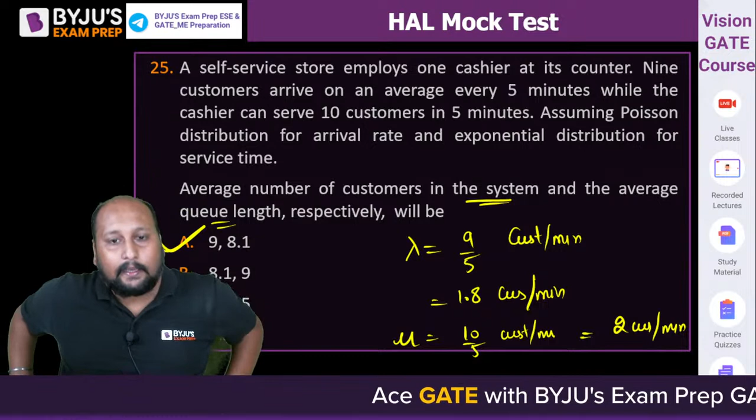So option A is the correct answer. Option A is the correct answer. All right. Okay. So these were the set of questions, and a good weightage is being asked. If you see, industrial ka weightage in HAL is good. Industrial, theory of machine, mechanics have a good weightage.

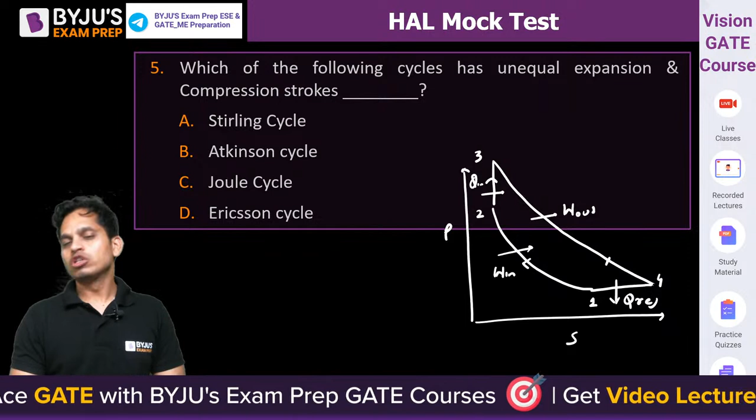Which cycle is this? What is this cycle? B, of course, Atkinson cycle. Constant volume heat addition, constant pressure heat rejection. Atkinson cycle. Stirling is the same: compression and expansion stop at the same point. Even Ericsson also. Ericsson is what? 2 isothermal, 2 isobaric processes. Okay.

What is the boiling point of ammonia? Boiling point of ammonia, quickly. Question number 6. Even after saying it so many times, you people do not write the question number. Why? You're in such a hurry to put the answer.

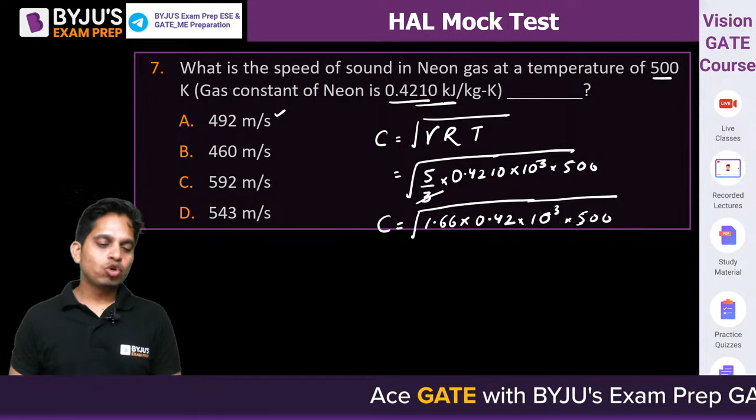Yes. How are you calculating then? ठीक है, 7C. 590 आ रहा है, सॉरी, 590 is the answer. So the closest one is 592. Okay, चलो guys, quickly tell me question number 9. फटाफट बता दो क्या है आंसर.

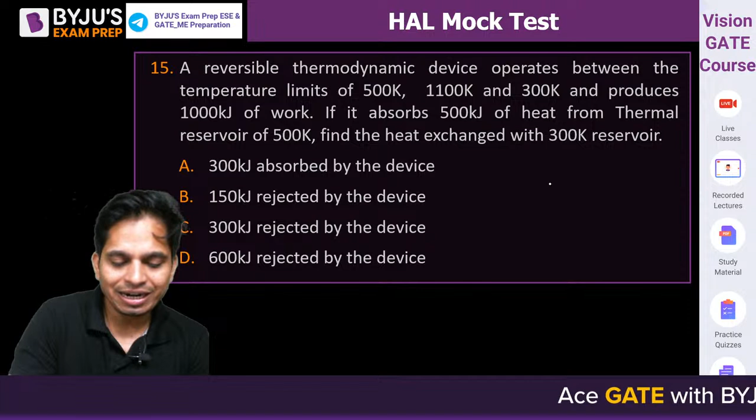Next. Very simple question, we have done this so many times. We have an engine that is interacting heat with, let us say, 500 Kelvin, 1100 Kelvin and 300 Kelvin, and from 500 Kelvin it is taking 500 kilojoule of heat, and then it is taking, let's say, Q2 from here, it is taking Q3 from here and producing work.

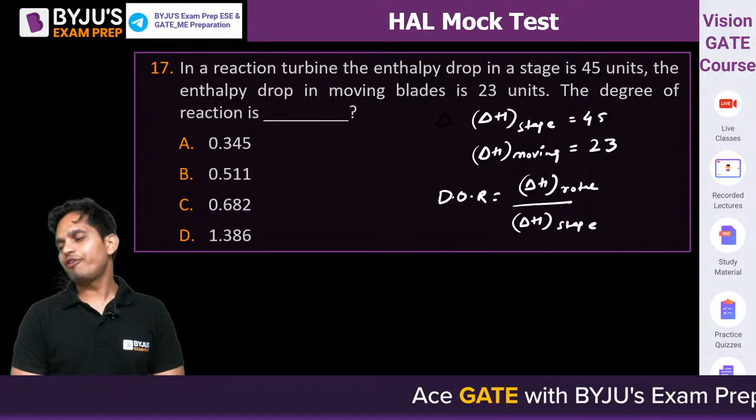Reaction turbine, the enthalpy drop in stage. So delta H in stage is 45. Delta H in moving blades or rotor is 23. Degree of reaction I need to find out. Degree of reaction कैसे निकालोगे? Change in enthalpy of rotor by change in enthalpy of stage. 17th कितना आ रहा है? Yes, 0.511. Yes, 17 B. Very good.